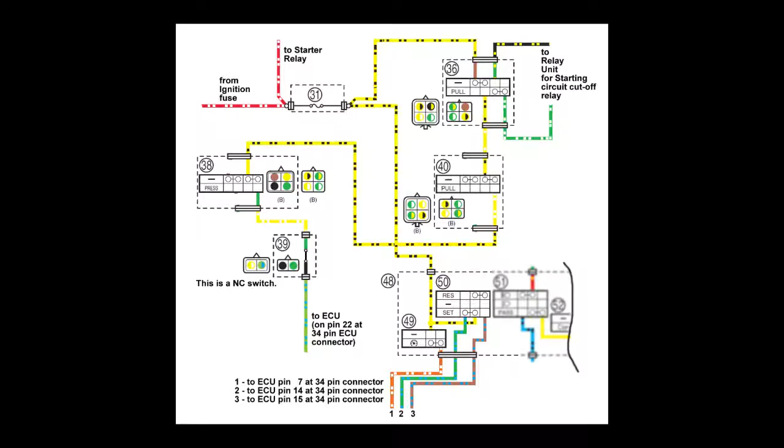The cruise control system on the new FJR 1300 has one electrical circuit to turn the cruise control system on and to set or modify the vehicle speed, and a second circuit to cancel the current speed setting, releasing the throttle for normal rider operation.

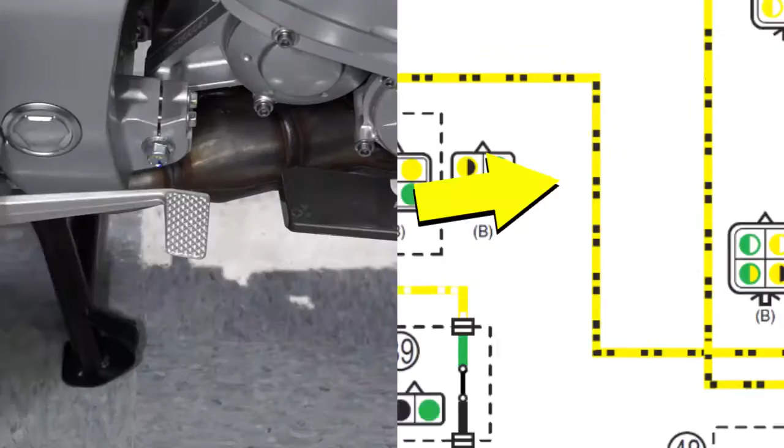The cruise control system is designed so that any of the following actions cancels the current speed setting: pulling in the clutch lever, applying the front brake, applying the rear brake, or twisting the throttle forward past the normally closed position. Any of these actions cancels the current speed setting, but the cruise control system stays on, ready to resume the previous set speed or set a new speed, as long as the unit is in third gear or higher and between 31 and 80 miles an hour.

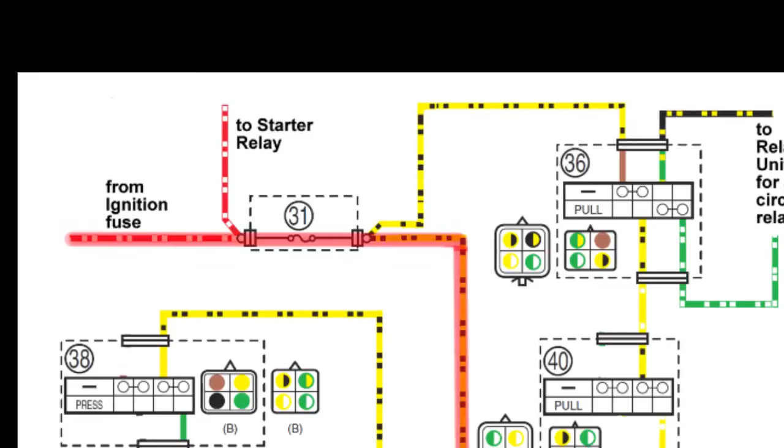The circuit to turn the cruise control system on and to control speed is made up of the cruise control power switch and the cruise control setting switch in the left handlebar switch assembly. With the main switch on, battery voltage goes through the ignition fuse to the cruise control system fuse, to the cruise control power switch, and a parallel circuit to the cruise control setting switch, both inside the left handlebar switch assembly.

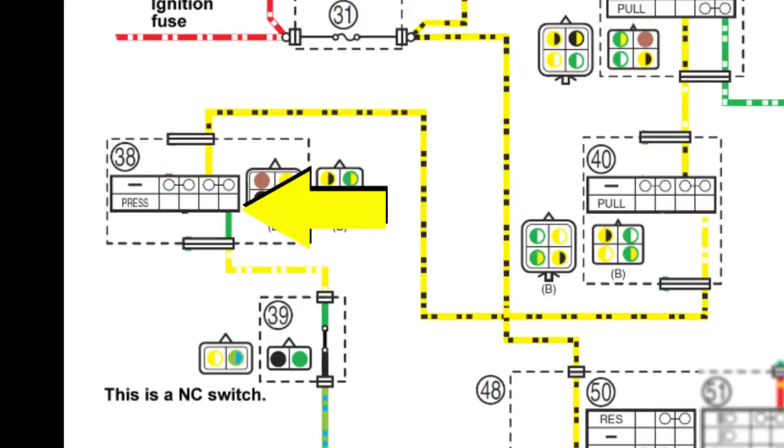The canceling circuit is made up of the clutch switch, front brake switch, rear brake switch, and the grip canceling switch located on the fuel injection throttle bodies. These switches are in series with each other, so that opening any of the switches cancels the current speed setting.

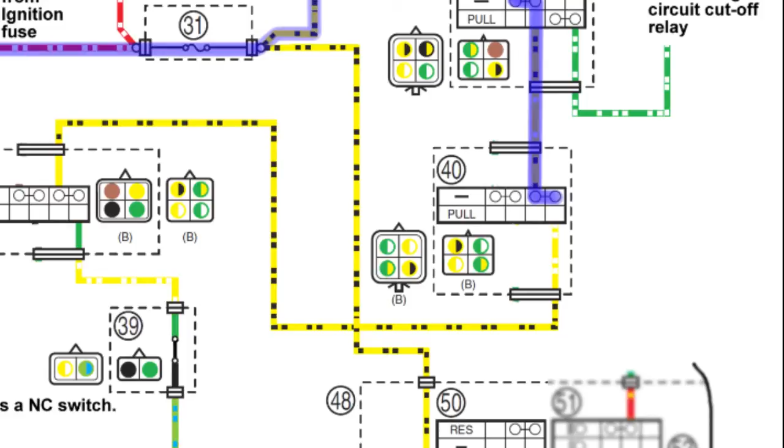Battery voltage goes through the ignition fuse to the cruise control system fuse to the clutch switch. If the clutch switch is closed, meaning the lever is released, voltage goes to the front brake switch. If the switch is closed, brake not applied, voltage then goes to the rear brake switch. If that switch is closed, brake not applied, voltage goes to the grip cancel switch on the FI throttle body assembly.

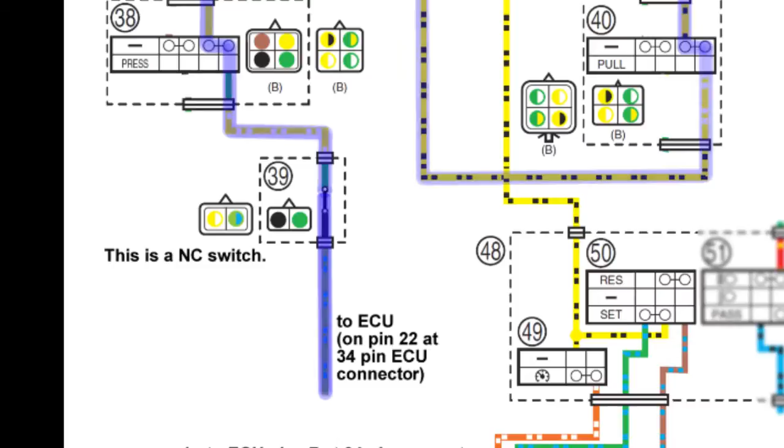The grip cancel switch is a normally closed switch, so the voltage flows to the ECU on the light green and blue wire at pin 22 in the 34-pin multi-connector. Twisting the throttle closed or forward past the normal closed position opens the grip cancel switch. You should note that the wiring schematic in the service manual draws the grip cancel switch open.

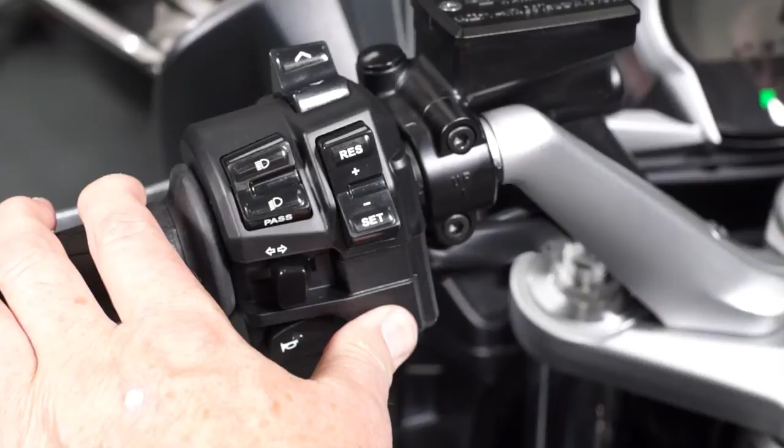The cruise control system can be turned on at any time, but it will not set and hold a speed unless the unit is in third gear or higher and going between 31 and 80 miles an hour. To turn the cruise control system on, the main switch must be on, then press the cruise control power switch. Battery voltage then goes from the left handlebar switch assembly on an orange-white wire to pin 7 at the 34-pin ECU connector. The cruise control indicator light should come on.

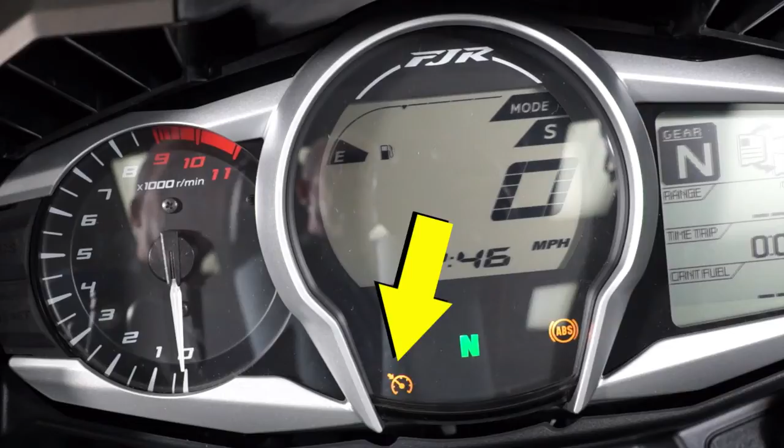This is a normally open momentary switch, like a starter button. Pressing the button closes the switch and sends battery voltage to pin 7 only as long as the button is pressed. If the cruise control system is off, this battery voltage tells the ECU to turn the cruise system on. If the cruise control system is on, the battery voltage tells the ECU to turn it off.

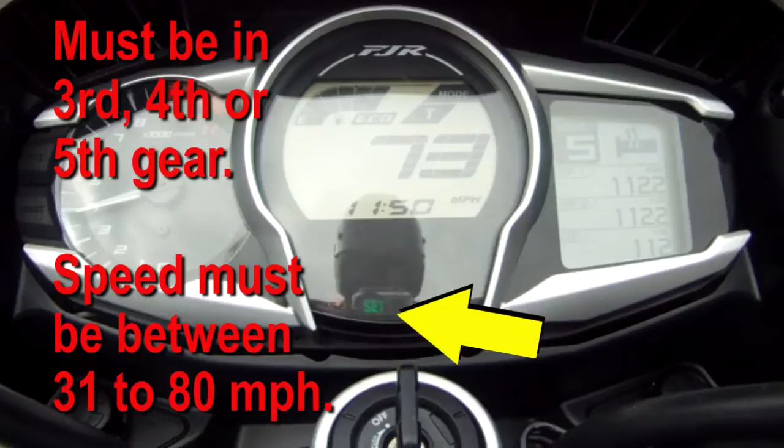With the cruise control system on, the system is now ready for speed setting, if the unit is in third gear or higher and between 31 and 80 miles an hour. To set a speed in the cruise control system, press the cruise control setting switch to the set position. This sends battery voltage from the left handlebar switch assembly on a green-blue wire to the ECU on pin 14 at the 34-pin multi-connector. The set position also has two other functions, which reduce speed.

If the button is held in the set position, the cruise control system will start to close the throttle and speed will decrease as long as the button is held. You release the button between 31 and 80 miles an hour, that will be the new set speed. If you press the button to the set position for just an instant, speed will decrease in 1.2 mile an hour increments each time the switch is pressed.

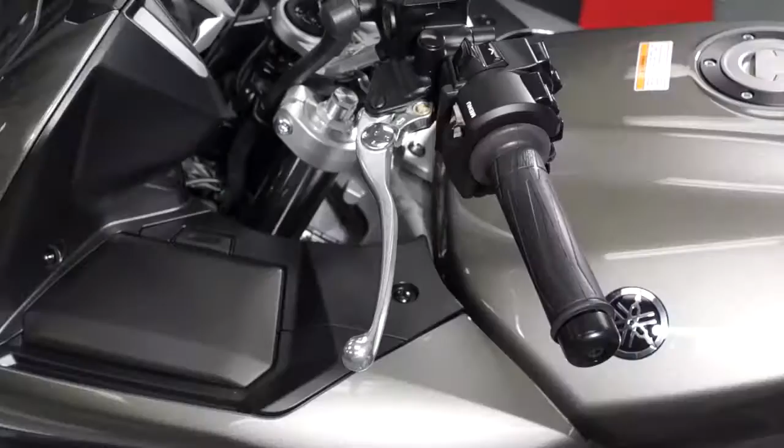The resume position also has three functions. If the cruise control is on and the speed is set, and the rider applies the brakes, pulls the clutch in, or forces the throttle past the closed position, the current speed will be canceled. If the resume button is pressed, the cruise control system will resume this previously set speed. And if the resume button is pressed and held, the speed will increase as long as the button is held.

When the desired speed is reached, between 31 and 80 miles an hour, release the button and that will be the new set speed. If you press the button to the resume position for just an instant, speed will increase in 1.2 mile an hour increments each time the switch is pressed.

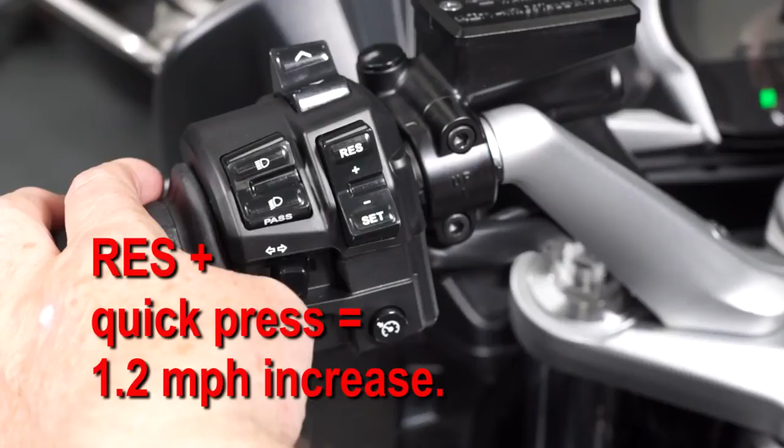Pressing the cruise control switch to the resume position sends battery voltage on a brown-blue wire to ECU pin 15 on the 34-pin multi-connector. Here are some stats and important points regarding the cruise control system to keep in mind when investigating any complaint. The set speed and the rear wheel speed signals are compared every 1/10 of a second to decide the correct throttle opening.

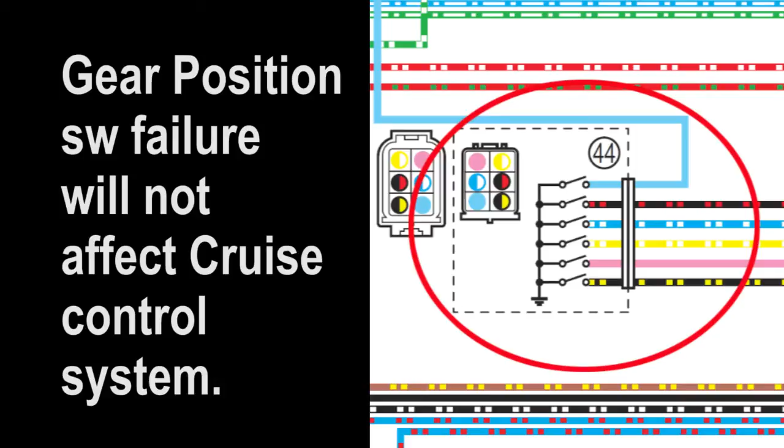A fuel injection system problem resulting in a fault code will cancel the set speed and will not allow setting the cruise control system speed as long as the fuel injection code is active. But an ABS fault code will not interfere with cruise control system operation. A faulty gear position switch will not prevent setting of the cruise control system. This switch is mainly for the YCCT system and the gear display on the meter assembly. Which gear the transmission is in is actually calculated by the ECU using engine RPM and the rear wheel speed sensor information.

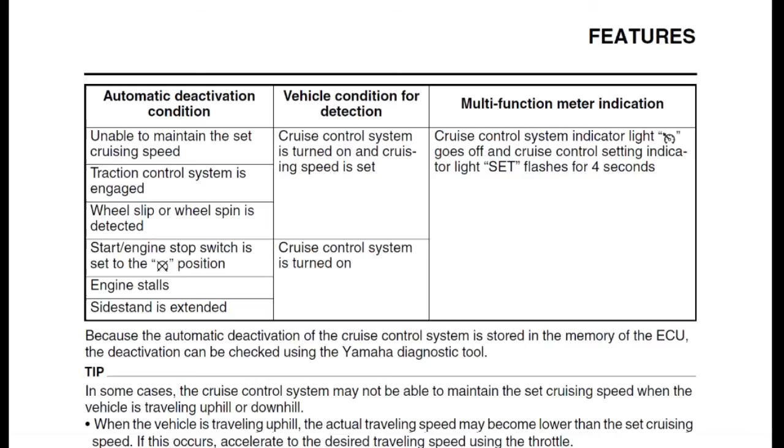There are several situations where the ECU will automatically deactivate the cruise control system. If for some reason the cruise control system cannot maintain the set speed, meaning the ground speed decreases by more than 6 miles an hour from the set speed within a preset time value, the cruise control system will automatically deactivate. If the traction control system is turned on and gets activated by excessive wheel slip or wheel spin, the cruise control system will automatically deactivate.

The ECU is monitoring wheel slip and wheel spin even if the traction control system is off. So if wheel slip or wheel spin is detected, the cruise control system will automatically deactivate. And if the start engine stop switch is set to the off position, the engine stalls, or the side stand is extended, the cruise control system will automatically deactivate.

In all of these cases, if the cruise control system is on and is set with a current speed, the cruise control system and the indicator light will go off, and the set light will flash for 4 seconds. If the cruise control system is on but no speed is set, meaning the set light is not on, the cruise control system and indicator light will turn off.

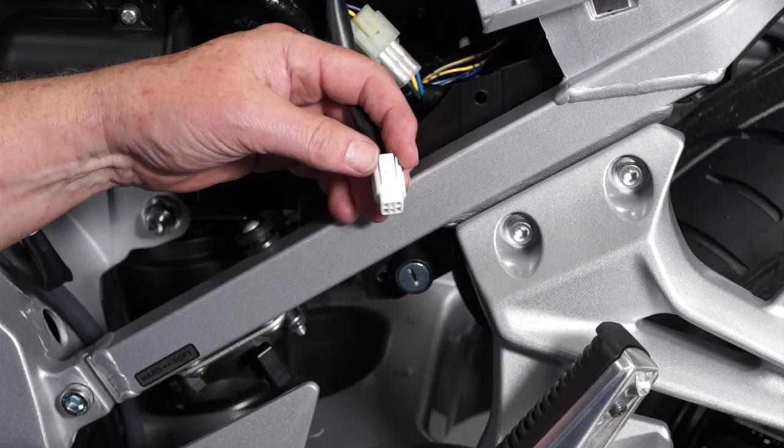Because the automatic deactivation of the cruise control system is stored in the memory of the ECU, the deactivation can be checked using the Yamaha diagnostic tool.

In some cases, the cruise control system may not be able to maintain the set cruising speed when the vehicle is traveling uphill or downhill. When the vehicle is traveling uphill, the actual road speed may become lower than the set speed. This may be due to being in too high a transmission gear for the grade or conditions, or encountering a very steep incline. If this happens, the rider should manually use the throttle to maintain road speed.

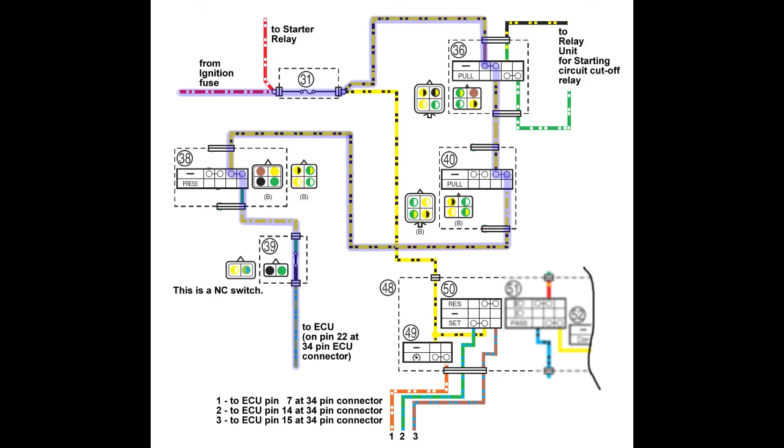When the vehicle is going downhill, the actual road speed may become higher than the set cruising speed. In this case, the setting switch cannot be used to adjust the set cruising speed. The cruise control system will not cancel going downhill, no matter how much speed is gained. To reduce speed, the rider should apply the brakes. When the brakes are applied, the cruise control system will cancel the current speed setting.

The cruise control system will allow approximately plus or minus 0.6 miles an hour difference between the set speed and the speed measured by the rear wheel speed sensor without changing throttle position setting.